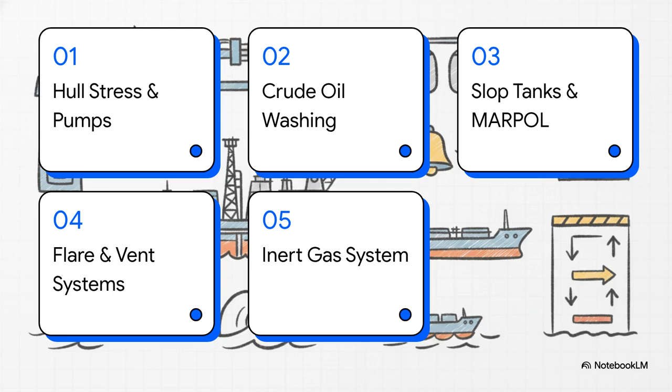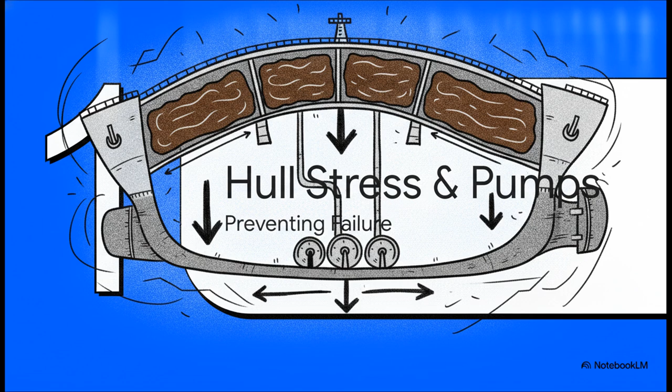First up, hull stress and pumps, preventing structural failure. We really have to address the first major threat to the FPSO. It actually isn't fire, and it's not a storm. It's the physical weight of the oil itself, which literally threatens to snap the ship's hull right in half if we don't manage it perfectly.

That is exactly why the Marine Superintendent uses highly sophisticated cargo calculation software. It continuously monitors draft, trim, list, and hull stress to map out perfectly balanced loading sequences. And, to counteract those massive weight shifts, dedicated ballast pumps continuously adjust the ship's draft and trim.

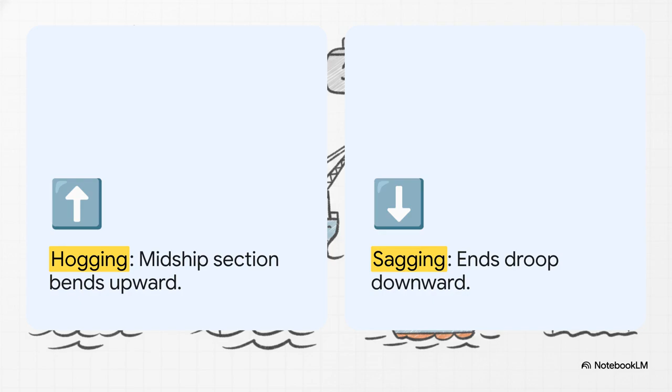So, how do we actually move all that oil? Older conventional tankers used massive, highly confined, and incredibly hazardous pump rooms. Modern FPSOs, they eliminate them entirely. Instead, they use deep well submersible pumps. The pump itself sits directly inside the cargo tank, totally submerged at the bottom of the oil, while its motor sits safely up on the deck.

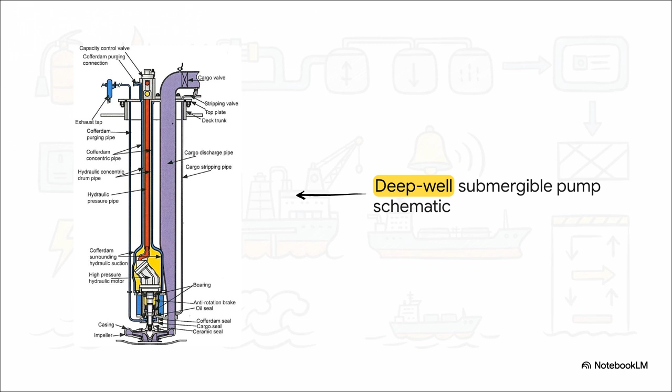And the really brilliant part of this design is the maintenance. Say a pump fails. You absolutely do not want to send a crew down into a toxic, highly explosive tank. With this setup, the entire pump assembly can just be unbolted and pulled straight up through a spool piece right on the deck. It completely removes the need for dangerous tank entry, all while maintaining high-capacity discharge rates to shuttle tankers.

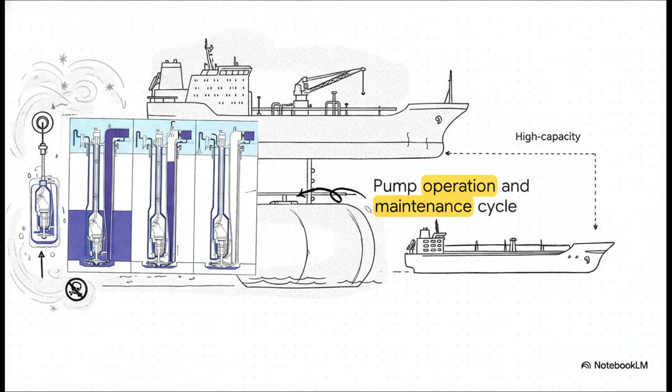Next is crude oil washing, eliminating internal hazards. What happens when you pump that crude oil out? The tank doesn't magically stay clean. The crude leaves behind this thick, heavy, waxy sludge plastered all over the internal bulkheads. Leaving that sludge creates massive operational and safety hazards. So the crucial question is, how do we clean it?

Well, international MARPOL regulations require a process called crude oil washing, or COW. Instead of washing the tanks with seawater, which creates a massive pollution hazard, we ingeniously use the cargo itself. High-pressure jets spray warm crude oil from rotating nozzle machines inside the tank. This literally dissolves and flushes that waxy sludge right down to the floor.

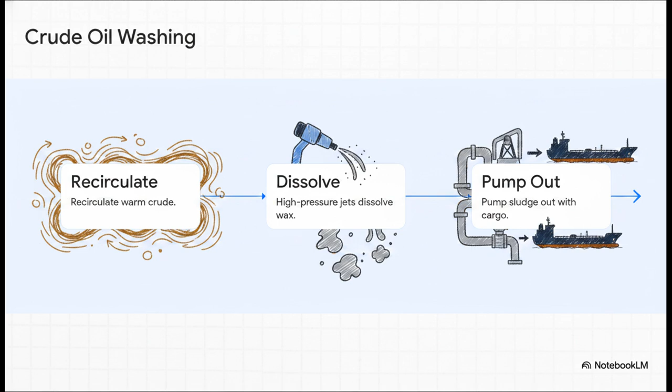And it's all done simultaneously with the cargo discharge. The crude being offloaded is recirculated through the wash machines, then pumped straight over to the shuttle tanker. Crucially, because this high-pressure spray creates a highly flammable mist, the tank's oxygen level has to be kept strictly below 5% the whole time.

Section 3, Slop Tanks and MARPOL, Preventing Environmental Catastrophe. There are times when we absolutely must use water to clean a tank, like before a structural inspection. But washing an oil tank with seawater creates a huge oil-water mixture, and we definitely cannot just dump that overboard. This oily water gets routed into dedicated spaces called slop tanks.

The beauty of this system is its elegant simplicity. It relies almost entirely on gravity. The mixture enters a dirty slop tank, which is often heated to help break down the emulsion. Then gravity just does the work. The lighter oil floats to the top, where it's skimmed off and sent back to the cargo system.

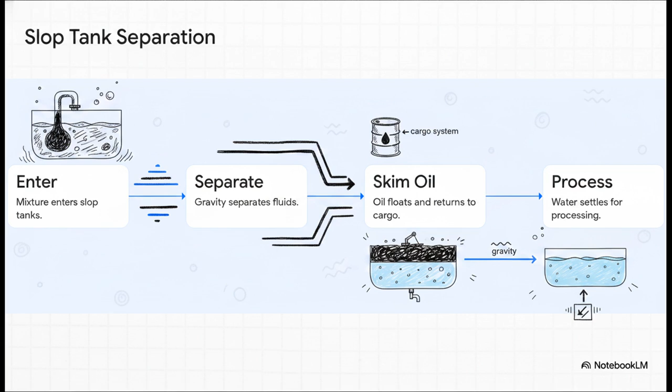The heavier water settles at the bottom and is carefully decanted into a clean slop tank for final processing. But clean is a very strict, highly regulated term here. Before a single drop of that water is discharged into the ocean, it must pass through an oil content monitor.

This automated system continuously samples the water. If the oil content hits anything above 15 parts per million, which is the absolute legal limit set by MARPOL, the system triggers an alarm and automatically slams the discharge valves shut.

Moving on to flare and vent systems, managing volatile gases. We've managed the liquid oil and the sludge, but now we have to escalate to the most immediate, volatile danger on board: highly pressurized hydrocarbon gases. The reality is, oil processing continuously generates excess gases, and pressure levels can spike without warning.

To handle that threat, the FPSO relies on a robust flare and vent header arrangement. Think of these headers as massive, closed collection highways running the entire length of the ship. When an emergency shutdown triggers or a pressure relief valve pops, all that highly pressurized gas is instantly routed into these closed headers. They safely transport the gas away from the deck and directly into the flare scrubber.

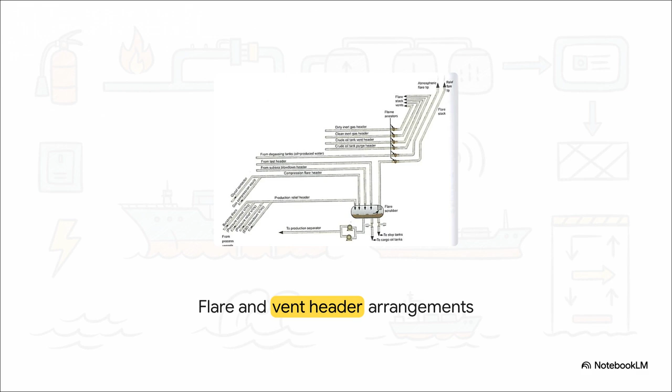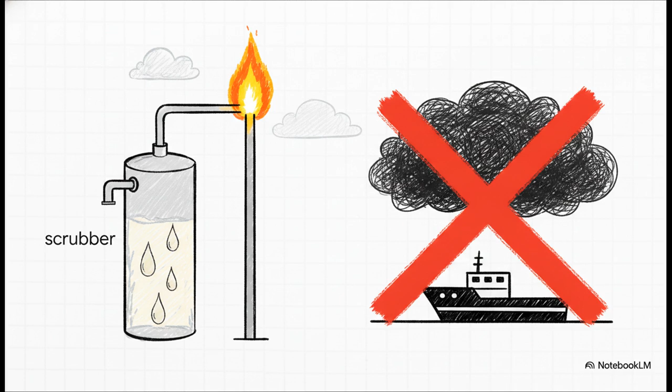The flare scrubber's job is essentially to knock out any residual liquid droplets. This is vital because liquid hitting a flare tip is incredibly dangerous. Once scrubbed, the gas goes up the stack and gets ignited. Now, why burn it? Because safely converting toxic explosive hydrocarbons into CO2 and water vapor absolutely eliminates the catastrophic risk of an invisible, unignited gas cloud slowly accumulating and drifting across the deck.

Now, over on the cargo storage side, everyday loading and discharging creates a really similar pressure problem. Pump oil in too fast? The tank could literally burst from overpressure. Pump it out too fast? It could collapse inward under a vacuum. Each tank has pressure vacuum valves to prevent this.

But as a heavy-duty failsafe, we rely on liquid-filled PV breakers. If the main valves somehow fail, a severe pressure spike will physically blow the liquid seal right out of this breaker, instantly opening a massive unrestricted vent path to save the ship's structure.

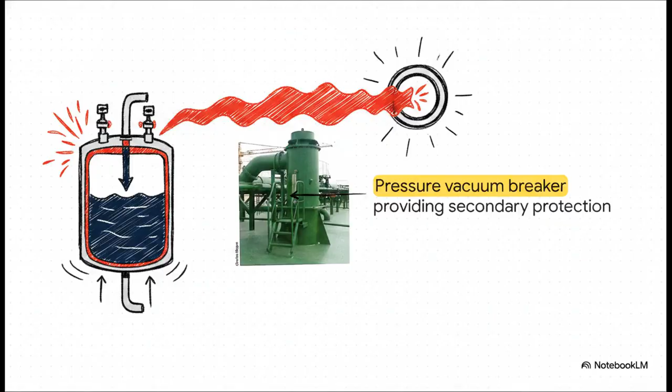Finally, our last section, the inert gas system, the ultimate fire prevention. Venting alone just isn't enough. Even a completely empty, vented cargo tank is incredibly dangerous because the lingering hydrocarbon mist inside is just waiting for a single spark. We literally have to alter the atmosphere itself.

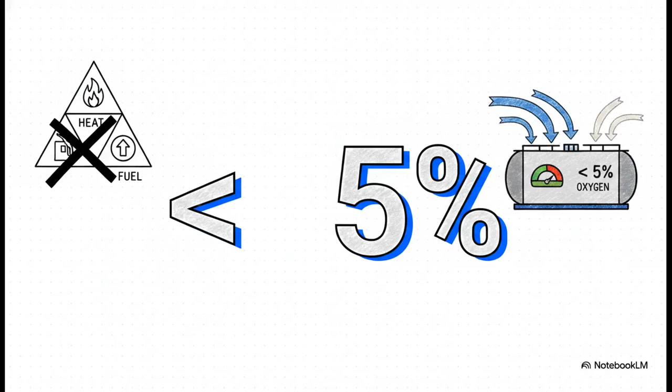Remember, to have a fire, you need 3 things: fuel, heat, and oxygen. We can't remove the fuel vapor, so we remove the oxygen. The inert gas system, or IGS, forcibly replaces the air in the cargo tanks with a scrubbed gas mixture, guaranteeing the oxygen level inside stays well below 5%.

At under 5% oxygen, the tank atmosphere is chemically incapable of catching fire or exploding. It just can't happen, no matter how much hydrocarbon vapor is in there. Let's actually trace this flow to see how it builds a complete defensive loop. The IGS burns heavy fuel oil in a dedicated boiler.

That scrubbed flue gas, containing 14 to 16% CO2 and less than 5% oxygen, gets pushed through a scrubber tower that uses seawater to wash out soot and corrosive acids. But here is the really critical part. As the gas travels down to the cargo tanks, it passes through the deck water seal, right on the boundary between the safe area and the hazardous deck.

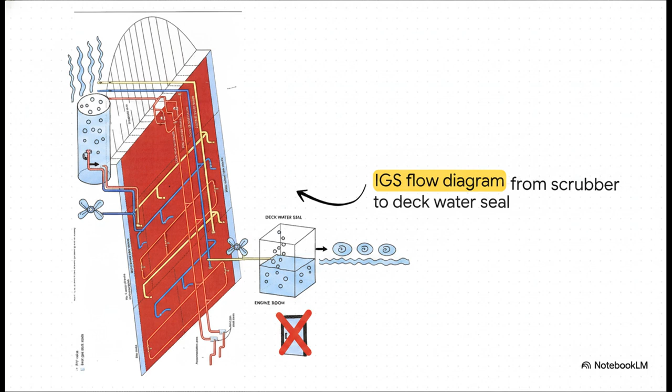This seal forces the gas to bubble through a column of water. If the blowers ever fail, that water barrier physically blocks highly explosive cargo vapors from flowing backwards into the IGS machinery. So, bringing it all together, you can really see how these 5 systems are deeply interconnected to prevent disaster.

Deep well pumps safely manage the cargo weight to stop hull failure. Crude oil washing safely removes hazardous sludge. Gravity-fed slop tanks defend the ocean from pollution. The flare system neutralizes explosive gas pressure spikes. And the inert gas system actively kills the fire triangle by choking out the oxygen.

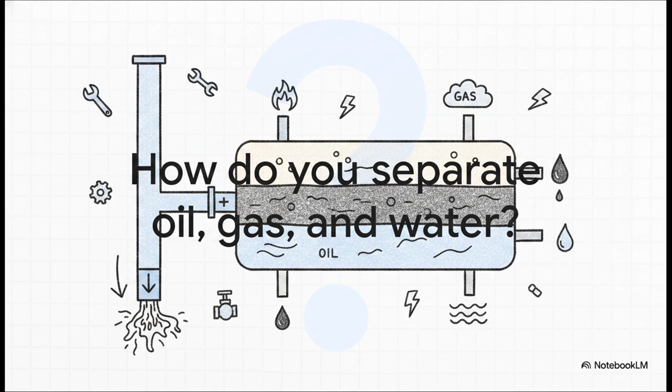We've thoroughly explored how the FPSO safely stores and exports its massive cargo. But where does all that pure, export-ready oil actually come from in the first place? In our next explainer, we are heading right into the very heart of the FPSO's topside production modules. When highly pressurized, chaotic fluid blasts up from the wellhead, how exactly do we separate the oil, the gas, and the water?